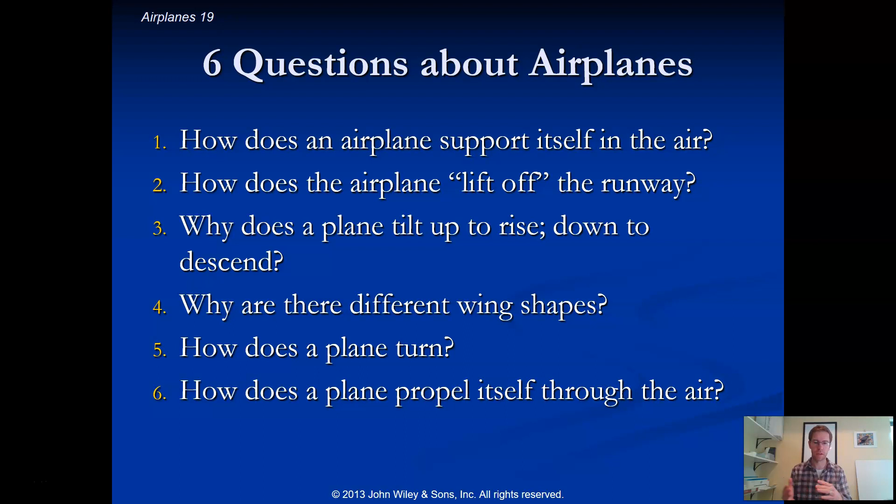And then the last couple questions are both about what are the mechanisms behind how an airplane controls its flight. How does it turn? How does it propel itself forward through the air? And what parts of the airplane affect that?

All right, so now let's try to discuss how an airplane can actually support itself when it's in the air, which is fascinating to think about, right? An airplane, you, me, everybody in this class, and a bunch of our friends, we could all go pile into a big metal tube, and we could go zooming forward super fast with wings sticking out, and then all of a sudden we can lift off and start to fly. It's incredible, right? We have a bunch of weight, all of us, our gear, our luggage, the pilot, the airplane itself, all of that has weight. And we can have an upward force being generated somehow by this airplane that's strong enough to overcome, to be larger than our weight and make us able to fly. How is that possible? That's what I want to talk about.

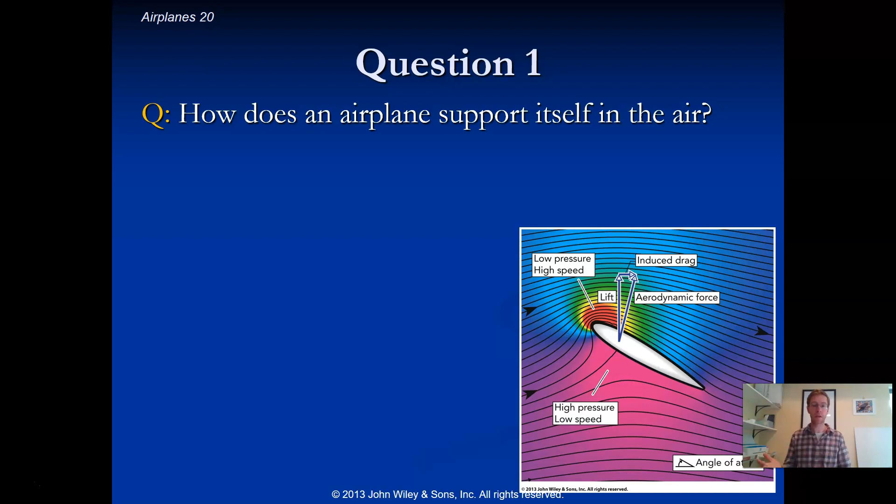As we think about it, ultimately, what's happening with an airplane, if we think about how rockets worked, they were able to propel themselves forward by pushing off of something. This idea of Newton's third law, or conservation of momentum, to describe how things can fly also applies here. In order for an airplane to be moving forward and supporting itself vertically to offset its weight, it needs to be pushing off of something. In this case, it's pushing off of the air. So it pushes air back to propel itself forward, pushes air down to propel itself up. With those ideas, we can conceptually understand how an airplane is actually able to fly.

So it uses this wing shape, as you can see here, a wing at an angle, either a uniform symmetric wing like this, usually for faster, smaller planes, or a slightly different shaped wing that we'll investigate later for more commercial airplanes. But regardless of how it is, the airplane is set up in such a way to allow air to be deflected downward, bending air down, pushing upward on the airplane, not dissimilar from how curveballs work, as we talked about, right?

If you look at this flow diagram, this is an airplane wing, like a cross-sectional cut, just to look at flow around the wing alone and not the rest of the airplane. This airplane is moving to the left, so the air appears to be going over it from left to right. Underneath the airplane wing, the air hits the bottom of that wing, slowing down, and as the speed goes down, we know pressure goes up. Air going over the top has much further to go, so it rushes up and over the airplane wing. On top of this wing you have higher speed air and lower pressure as a result, so you have a pressure difference. There's higher pressure below, lower pressure above, and that generates a net upward force that we call a lift force.

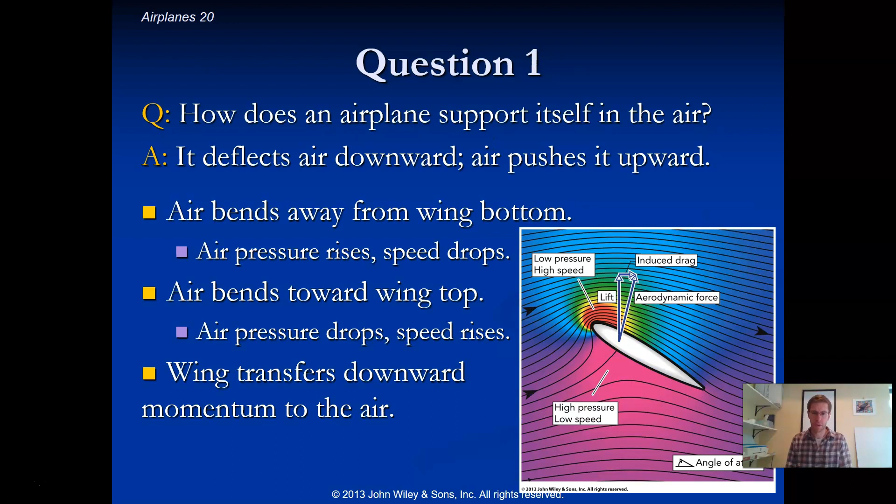Really quite fascinating. Now, something interesting about takeoff. If you just have an airplane sitting there, barely moving or moving very slow, you get very symmetric airflow like this, which we talked about with the baseball. If you have a slow enough moving ball, you get symmetric airflow and there's no pressure differences. So if you have a slow moving airplane wing, you get symmetric flow and there's no lift being generated. So as you take off, the airplane wing needs to do something to create a different flow, to go from this pattern to one where air is actually being deflected down. So here, if we're moving slowly, it's uniform flow. The airplane needs to do something to cause that flow to change, to start deflecting air downward instead of having it fill in behind.

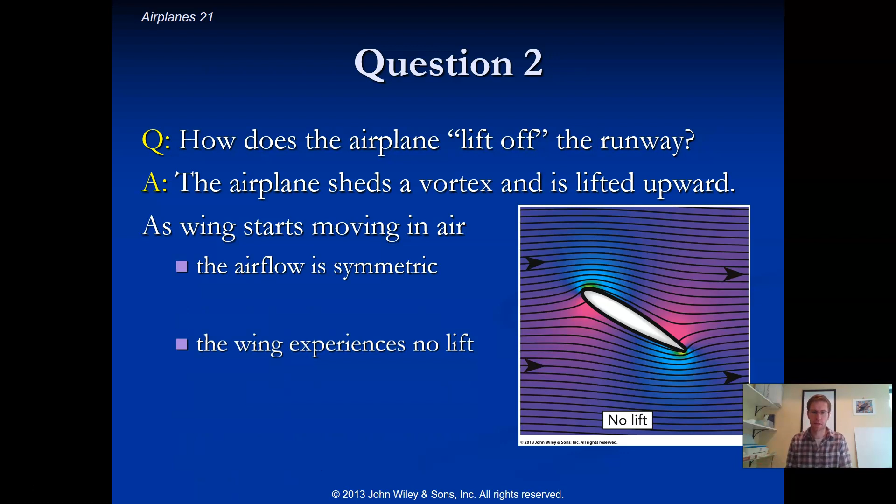And what that is, it's known as shedding a vortex, which is really cool. It creates almost like a little whirlpool up at this front point, because it's such a tight, small point of contact, it builds up high pressure right there that generates this vortex that occurs. And so as the wing starts moving forward, going faster and faster, eventually it's able to create this vortex, which will change the flow.

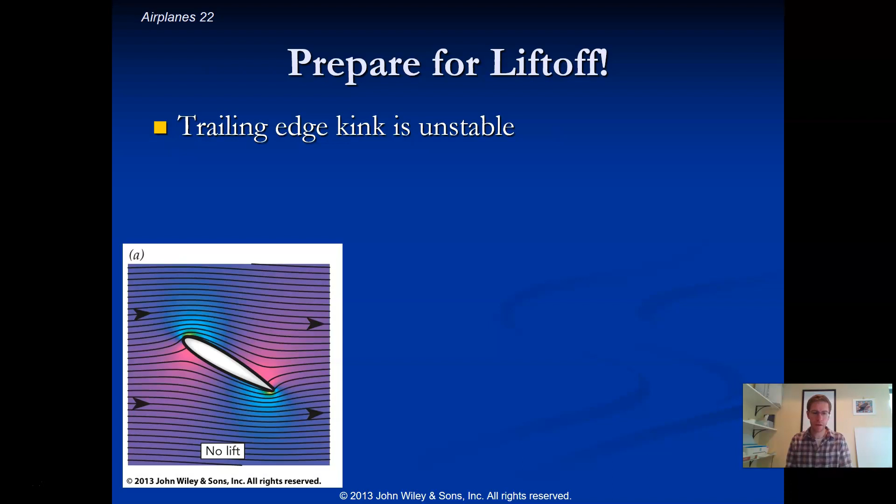So just to show you what I mean, here's the airplane wing moving forward through the air. If it gets going faster and faster, eventually a little whirlpool forms - the air trying to rush up over the top actually tumbles in on itself. It's not able to sustain this type of flow. It tumbles in, creating a vortex, like this little whirlpool you might have seen in a river, that moves down behind the back of the wing. That whirlpool, as it goes over, changes the entire flow pattern across the top of the wing and creates a situation where now you have lift. So you go from no lift, you shed a vortex, and then you generate lift afterwards. That's what's happening as you're accelerating down the runway, enabling you to eventually generate the lift needed for takeoff.

Pretty cool. So again, the lift force is usually approximately perpendicular to the direction of the object moving through the air. And so here we see the lift force generated by the airplane wing should be up in order to offset our weight force.

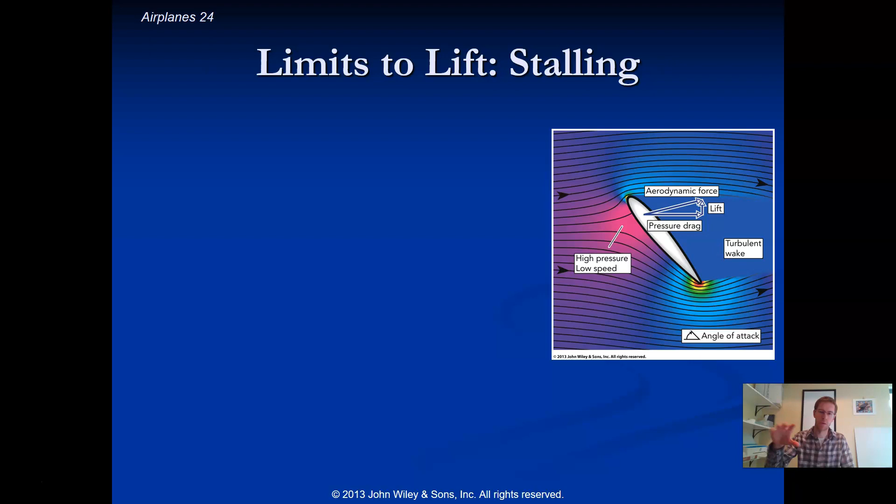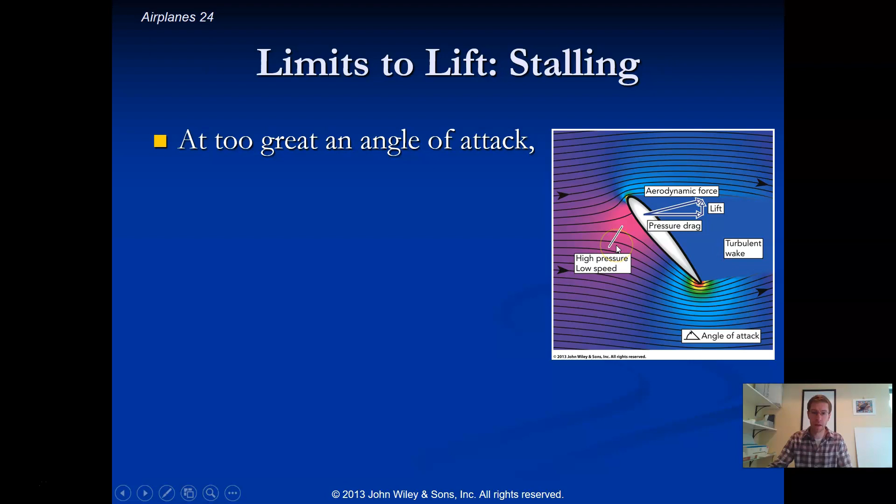One thing that's interesting to think about: if you have an airplane wing cutting through the air, and you wanted to take off faster, you might think you just tilt that wing up more and more. But what happens is if you tilt the wing too much, you can create a large turbulent wake behind your airplane wing. Just like with the baseball, you create a region behind the wing that has very turbulent and chaotic flow. If the air doesn't have time to come up and around the wing and fill in behind, what you're going to get is a big turbulent wake. That big turbulent wake results in low pressure behind the wing, high pressure in front of the wing, and now you have this huge pressure drag pushing back against your airplane wing, generating a great backwards force, slowing you down, and your airplane drops because your lift is dramatically reduced.

When you experience turbulence in an airplane, what's happening is you're getting a turbulent wake behind your wing, reducing the upward lift, and the airplane drops suddenly, which feels so scary. Pilots call this stalling because the boundary layer, the air flowing over the top, stalls out and stops moving behind the wing. It stalls and tumbles, creating the wake, which is why we suddenly drop. But as soon as you restore the uniform flow, the lift comes back and you pop back up. When this happens on and off repeatedly, you're bouncing around.

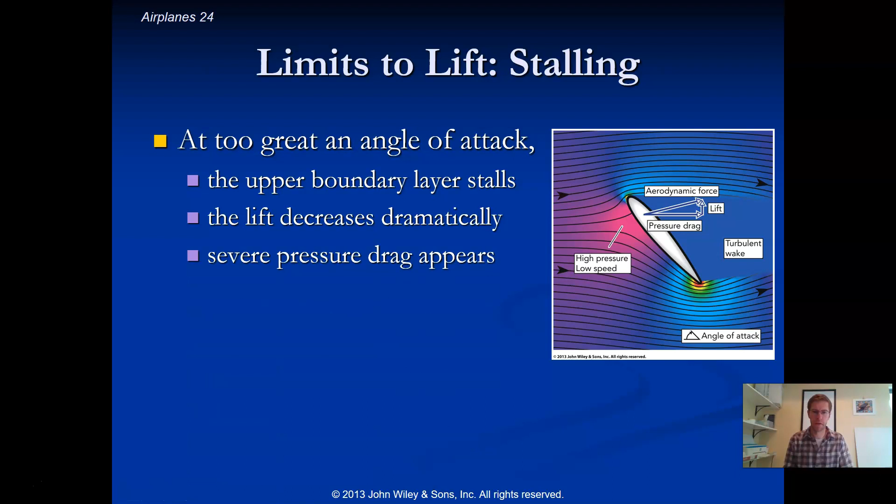The thing that helps make it less scary is if the pilot adjusts the direction of the airplane. You can always tilt down, decreasing the angle the wing is at, known as the angle of attack, to return to a nice steady flow. So your airplane drops when you feel turbulence, which is really just a result of the large turbulent wake behind the airplane wing.

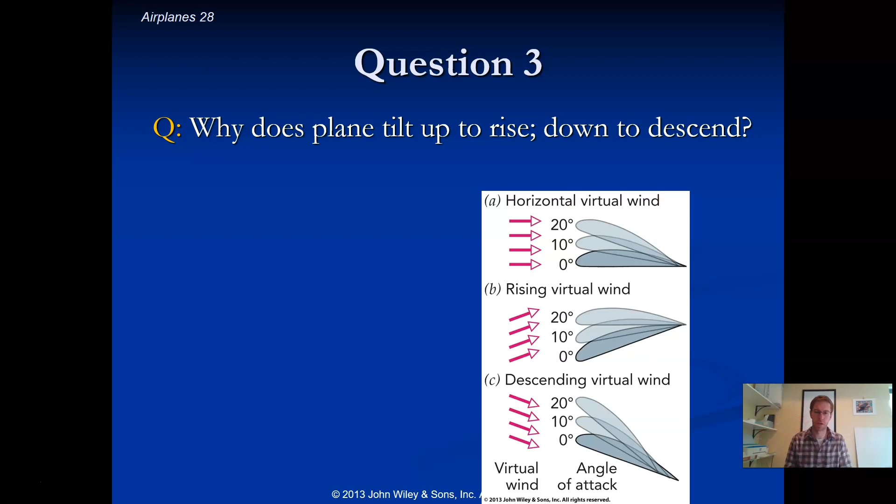The next question was about how an airplane tilts up to rise and tilts down, and why it's constantly changing the angle the wing is at. This angle the wing makes is what we call the angle of attack, and it's constantly changing to change the direction and magnitude of your lift force, because that angle directly affects your lift.

If you're going straight into a straight wind, you want a certain angle of attack, around 10 degrees or so, to generate nice lift to stay steady and offset your direction of motion. But if you start descending, offsetting your weight force, the air is now coming up from the bottom instead of straight onto your wing. Since the direction of the air is changing, the way the lift force is experienced also changes, so your angle of attack can be tilted much further down and still have a 10-degree angle of attack while descending.

Or if the airplane is taking off, you can again have a 10-degree angle of attack, because that's relative to the direction of the wind. So this is a 10-degree angle of attack, this is a 10-degree angle of attack, and this is a 10-degree angle of attack. All of those are very different positions for the wing, but it really just depends on how the air is flowing around it.

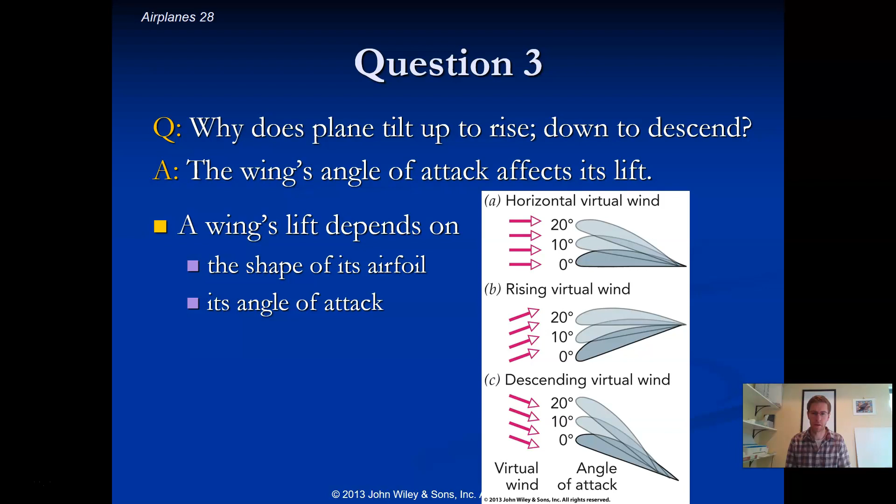Sometimes when we feel turbulence, it's because the direction of air flowing through the atmosphere we're flying through changes. The air goes from being horizontal to rising or descending, and that dramatically changes our lift force, so the pilots have to adjust. If it keeps changing direction a lot, you keep feeling different turbulence sensations. So we affect or adjust the angle of attack by just changing the angle of our airplane wing.

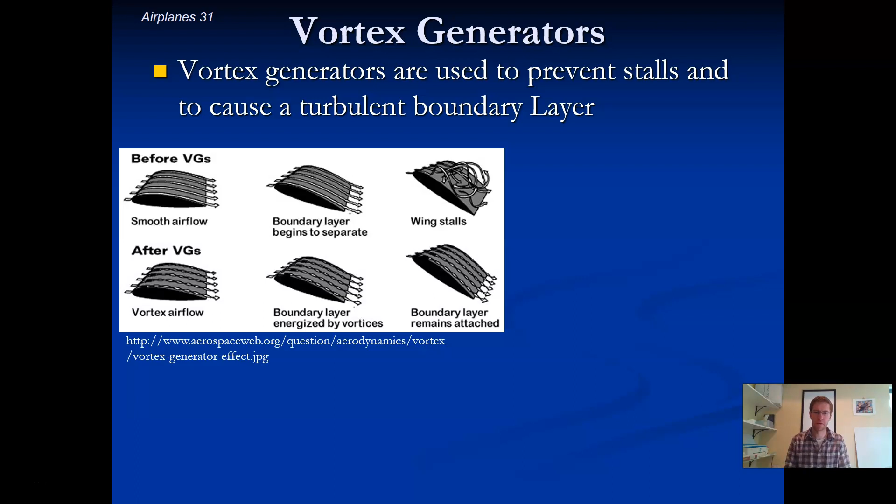One other cool thing to point out: just like the dimples on a golf ball or the hairs on a tennis ball, airplane wings actually have something known as vortex generators. These little bumps or metal pieces on the airplane wing are there intentionally to create a turbulent boundary layer, generating intentional small-scale turbulence in order to decrease the likelihood of large-scale turbulence behind the wing.

Just like with the golf ball and tennis ball intentionally creating a turbulent boundary layer to reduce drag, airplanes intentionally create a turbulent boundary layer to decrease the likelihood of a stall and an overall turbulent feel, a turbulent wake causing the airplane to drop dramatically. We create turbulent boundary layers using vortex generators.

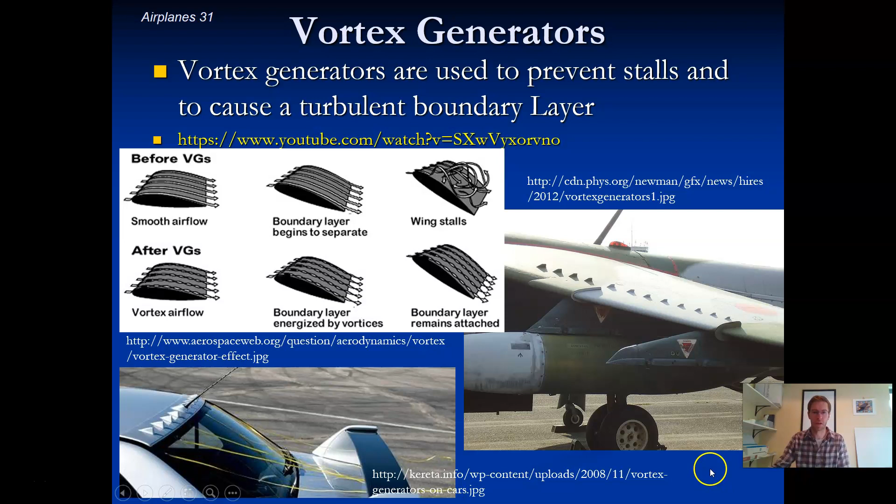Here's a picture of a car that has the same kind of thing, vortex generators on the back as well. There's a cool video I encourage you to check out, showing someone doing an experiment with vortex generators where you can actually see the smoother flow created by the turbulent boundary layer. It's really neat.

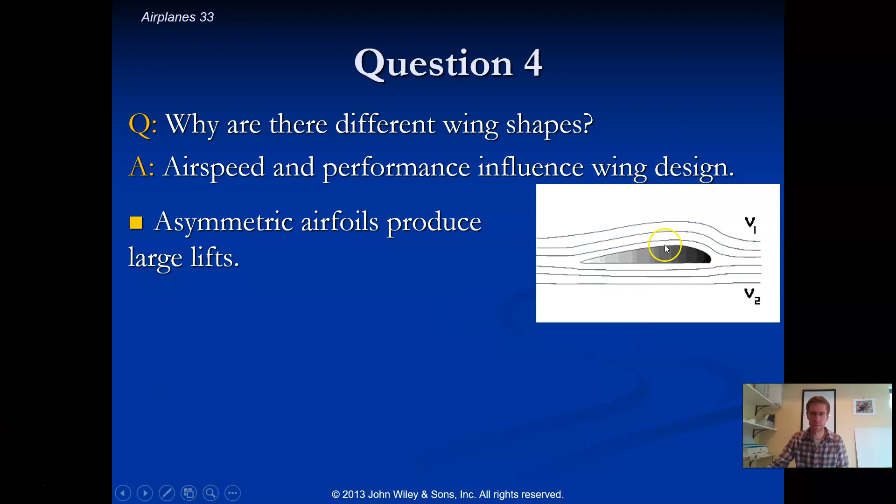Different airplanes have different style wings. Most commercial airlines have asymmetric airfoils, ones that are not symmetrical. As you can see here, the bottom is flat and the top is curved. That's an asymmetric airfoil, good for generating very large lift, and it's well suited for lower speed, more stable flight like we have in commercial airlines.

Symmetric airfoils, on the other hand, generate smaller lift but are much more dynamic, able to turn and even do barrel rolls, fly upside down, and other things more efficiently. So this is used more in fighter jets or show planes, things that aren't carrying very large loads or lots of people, where you're not trying to generate a nice, smooth, steady flight, and instead want greater flexibility.

So again, commercial airlines have these asymmetric type foils, where very naturally, even with zero angle of attack, they will still generate some lift.

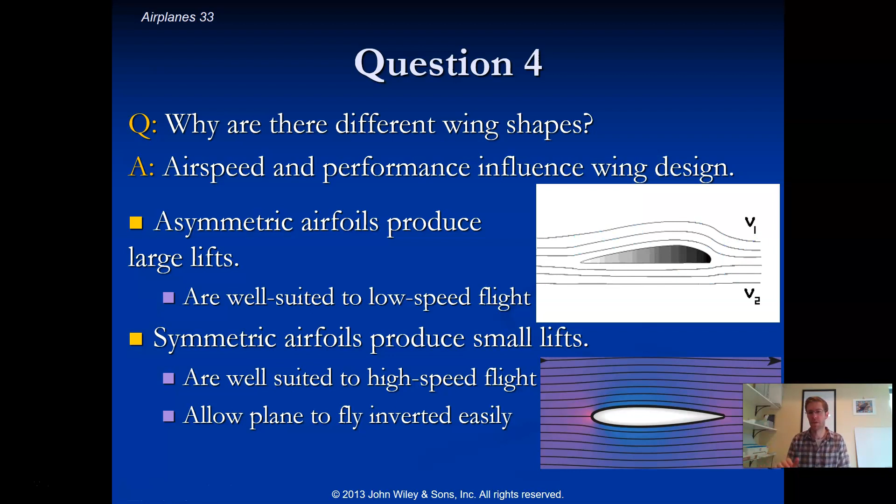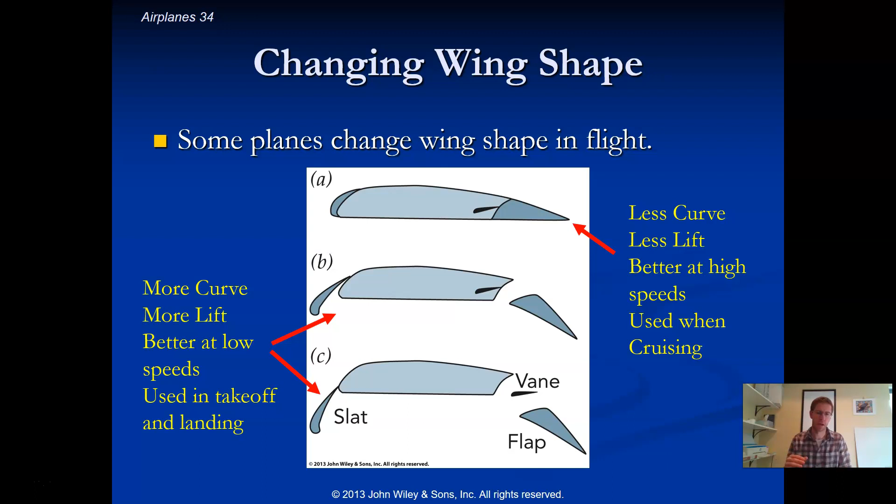These two, on the other hand, with more curvature, are able to generate more lift at lower speeds, so they're good while you're trying to take off or land. But at higher speeds they become much more vulnerable to turbulence and aren't used when flying at really high speeds. So picture A is more what you get at cruising altitude, while B or C would be during takeoff or landing.

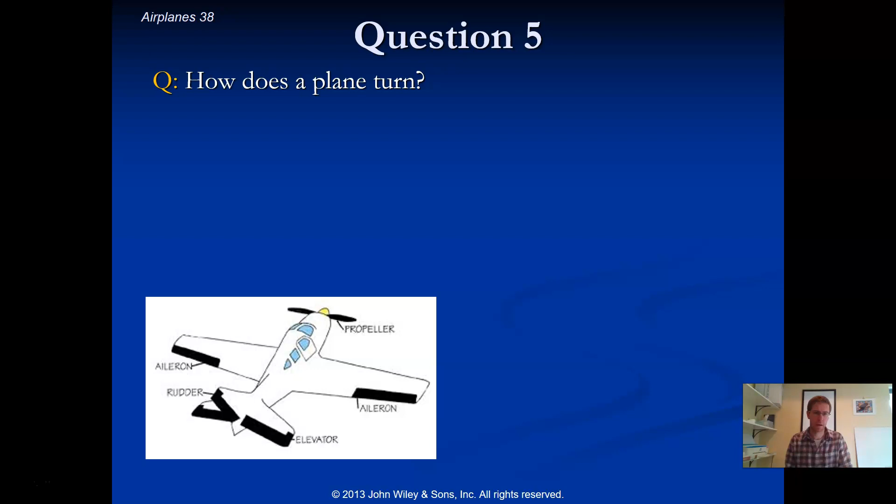The next question is, how do we actually control the flight of an airplane? It ultimately comes down to using and deflecting air in different directions. There are various parts, as you can see in this picture: the rudder, the elevators, the ailerons, and the propeller. They're all different parts of how we control an airplane. The ailerons, rudder, and elevators are used for different aspects of turning, and the propeller is used to generate our forward motion, as we'll talk about next.

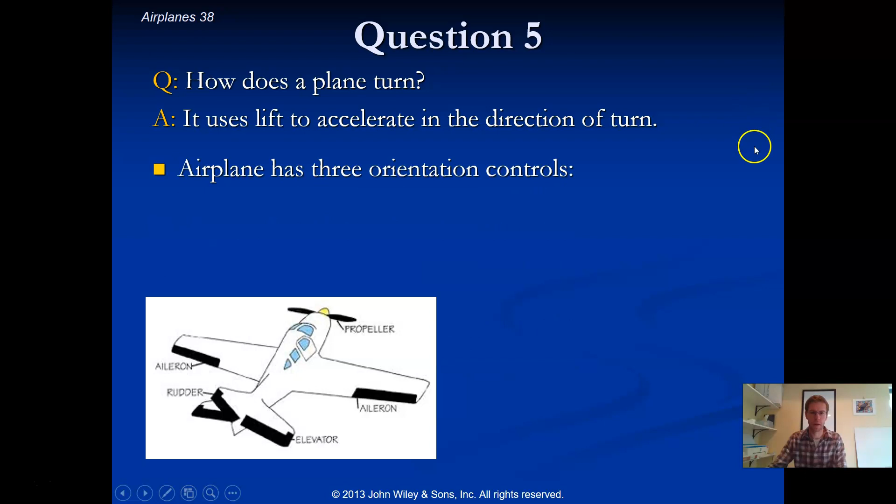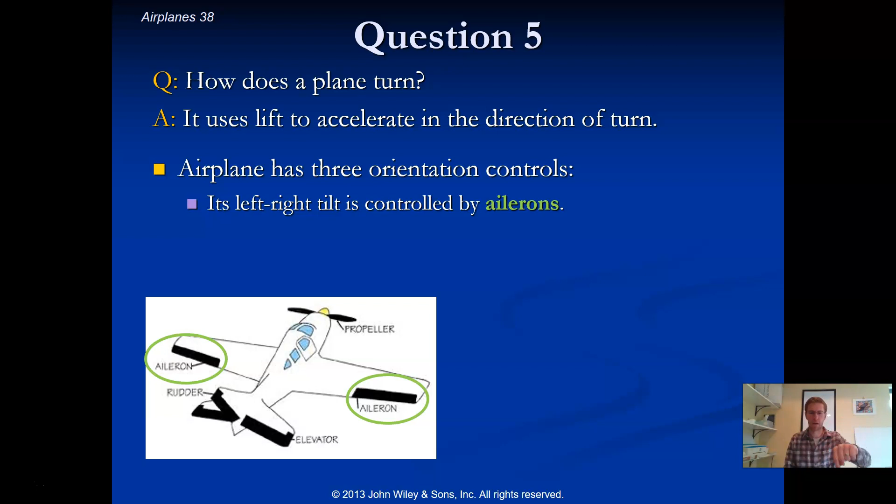As we think about an airplane, there are three different aspects of controlling it. First is controlling the tilt of the airplane. The ailerons can cause the airplane to tilt left or right, by putting one up and one down. So if that's the airplane and we wanted to tilt the left side up and the right side down, we'd put the right aileron up, deflecting air up and pushing down on the airplane, and put the left aileron down, deflecting air down and pushing up, and the airplane would tilt.

And so that's what the ailerons are able to do. We use the elevators to control our angle of attack. You can put both of them up, which pushes the back of the airplane down to increase your angle of attack. Or you can put both of them down, deflecting air down, pushing the tail up to decrease your angle of attack. So those are the elevators.

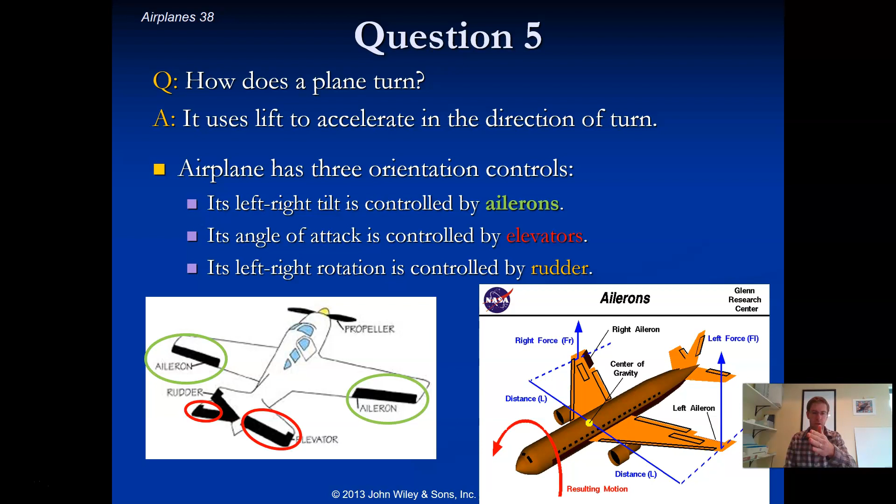And then the rudder can be used to change the direction you're pointing in space. You can put it off to the left, deflecting air to the left, and pushing the tail of the airplane right, or vice versa. And that's the rudder and how it can be used.

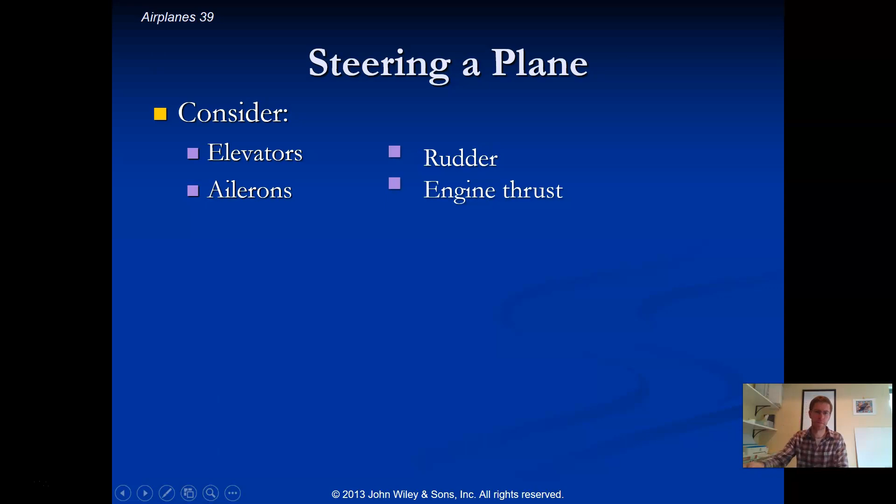All right, so let's think about how each of these can be used in generating the controls for the airplane. For example, which of these do you think is responsible for controlling the overall elevation of the airplane? Well, the elevators, obviously, as the name implies. Those are used to change your angle of attack, which allows you to climb or descend, in addition to the engine itself. How fast you're going will also affect your elevation. So both of those together can help control elevation.

And which do you think are more responsible for your direction and how you turn? Well, I'm guessing you could guess by now that those are mostly going to be about the ailerons that tilt you left or right, because if you tilt, then your lift is off at an angle and you're able to turn, or you can change how you're pointing with the rudder to also control your direction in space. So you can turn and or change your direction you're pointing in space.

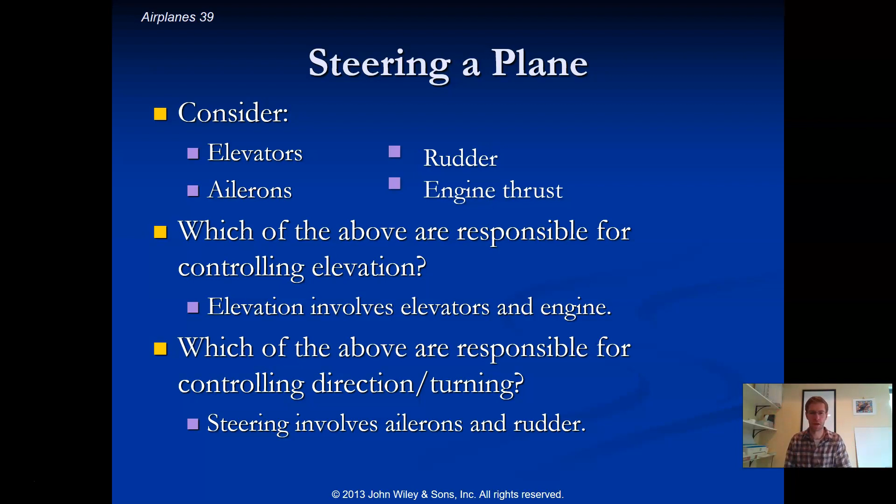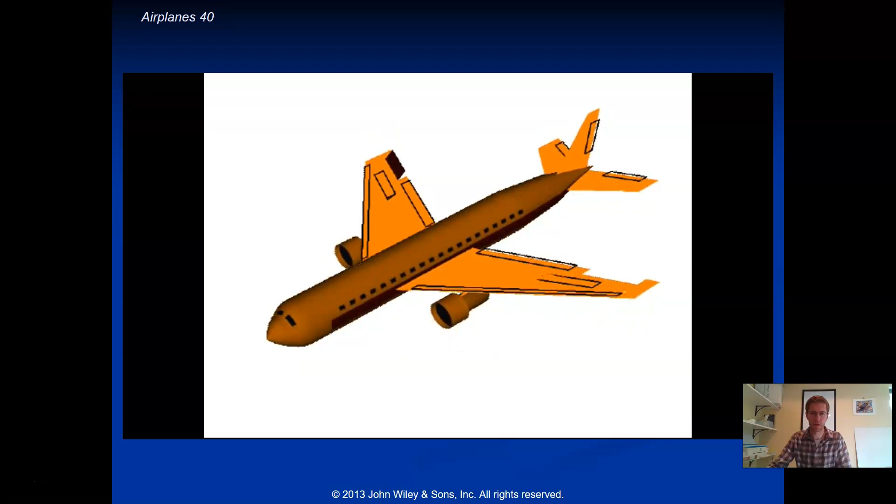So there's the ailerons. You can see how they cause the plane to adjust its tilt, which you can use for turning. Usually one goes up and the other down, so that you get forces on both wings to help change that angle. There's the elevators going, pushing the angle of attack up or down, depending. Those two usually will work together in the same direction. And then you also have the rudder here, which it didn't show, but the rudder would again be changing where you're pointing in space as well in the other direction.

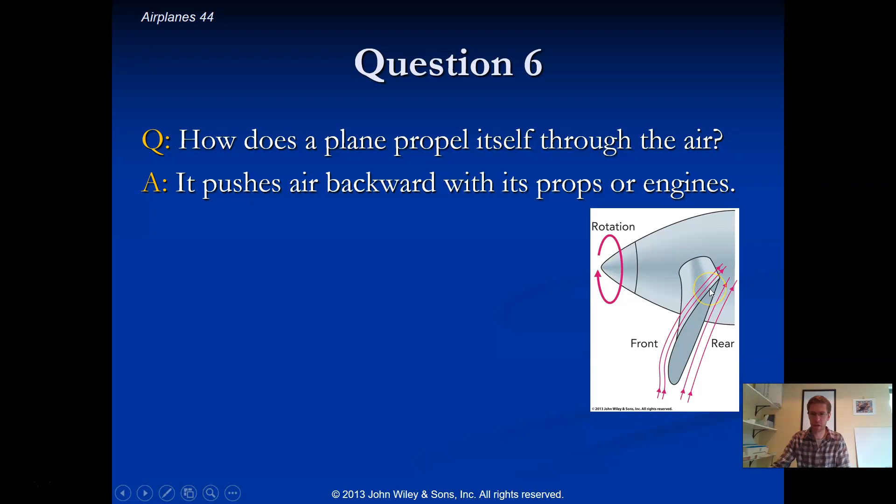And the last question we had, just to try to keep our video to about 20 minutes or less here, is how does a plane propel itself, actually propel your object forward? It's really cool. With a propeller plane, basically, as you can kind of see in this picture here, it basically just has these big spinning airplane wings. Those wings have the same shape, that asymmetrical airfoil shape.

As they're spinning and cutting through the air, they're deflecting air backwards, pushing the airplane forward. So the propellers are just like spinning wings, pushing air back and causing yourself to move forward. So overall, that propeller is pushing the air back. It's doing work, burning fuel.

If we think about conservation of energy, it's burning fuel, using that chemical potential energy to spin your propeller, and as it spins the propeller, it's pushing on the air, adding kinetic energy to the air backwards, which then propels and pushes your airplane in the forward direction. So you're pumping air back and it pushes you forward.

Turbojets are slightly different, the big things that you'll see on the wings of most commercial airplanes, but it's the same basic idea. They're using chemical potential energy, burning fuel, to take air in the front and accelerate it and shoot it out the back. It just uses different mechanisms rather than a spinning blade. It has more complex mechanisms that are going on to capture the air, compress it, add thermal energy as it burns, and shoot it out the back. But it's still the same basic idea.